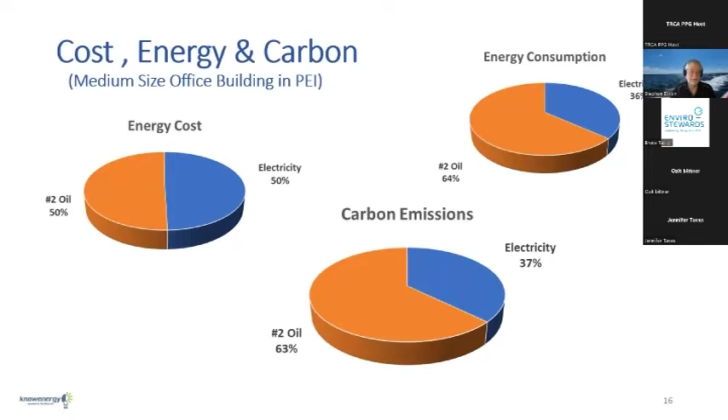So I'll provide a tool for that, Matt — we can send that out to everybody. You can put your numbers in and it'll generate your pie charts. This slide alone, I've had many people say, wow, that really changed my perspective on things.

The next segment, I'm going to talk about a walkthrough, going through a facility. This walkthrough was developed in small businesses like many of yours over many years of doing energy audits, energy assessments. I shy away from the term energy audit - I love energy assessment, energy walkthrough.

But there are really 7 steps in a walkthrough you have to take. You've got to start with understanding your consumption, price, and cost. What are you using, and what's it costing you? And what impact is it having in terms of carbon?

Then you need to understand how you compare to other organizations. Maybe you've got other facilities, stores, other plants, and so on within your organization - you can compare to theirs, or maybe you need to compare to others outside of your organization. I'll give you some ideas around how to do that.

Then you need to know when your building uses its energy. Today this is actually a very valuable and easy way to do things - we can look at your electricity profile. Some of you are going to be big enough that you'll be able to get a gas profile hourly and have a look at that. We find many opportunities there.

And then ultimately, just having a basic appreciation of where it's all going - is that machine over there, or that system over there, or this one in front of me, which is using more energy? Sometimes the size of the systems physically can actually belie their actual energy consumption.

So doing some basic numbers is a good thing. I'll provide a spreadsheet where people can dial in some basic information about a piece of equipment, and it'll give them an idea of what that cost might be.

Now, the first 4 steps is all about figuring out where all the energy is going. The next 3 steps is about what we can do, and the first step is get rid of waste. I define waste as being energy we don't need to use.

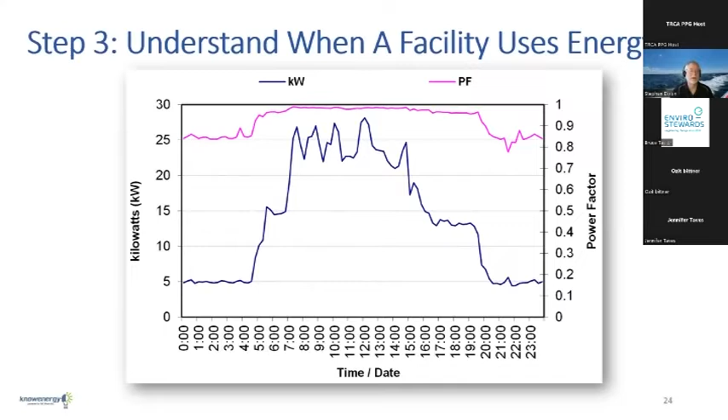We have a specific section on using a profile to understand where opportunities exist in your facility. I'll tell you a story of a facility that did this - we've done this in many types of buildings. This is actually a municipal building.

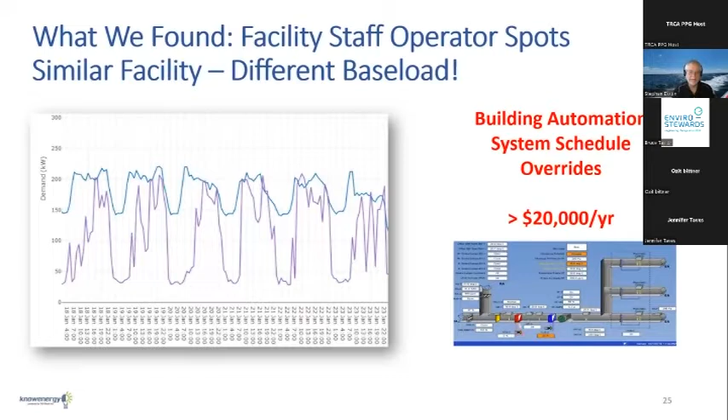So the 2 building operators, when we presented these graphs to them, actually sat and discussed, and they found over $20,000 worth of cost-saving opportunities. You can be guaranteed there was a lot of energy, both gas and electricity, attached to that finding. For them, that was a real win too, because they were able to see these things themselves. It wasn't somebody coming in saying you should do this - it was the operator going, look what we found. They owned that opportunity, fixed it, and realized the savings.

All right, understanding where a facility uses energy - this one becomes a little more complicated because you do have to do some calculation, but it's worthwhile sitting down if you can and starting to understand which devices in your facility use energy. You may need a little help for this, and there are probably some things that Matt and his organization can do to help you find resources here. There are also people from the gas company who can help you get some of these insights.

So reach out to those. But at the end of the day, have a reasonable understanding of where all the energy is going in your facility, because that's going to form the basis for what you can do. Oftentimes, if you've got this particular breakdown, people say, I didn't realize the lighting, or I didn't realize the plug load - in this building the plug load was 15%, but we found one the other day where the plug load, things you plug into the wall, were 37% of their energy consumption. That was a thing that needed action taken on.

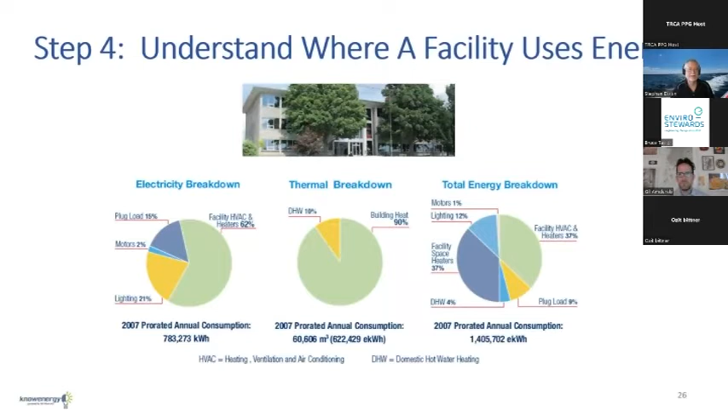All right, let's take a little further walk down the road here. The last three steps: waste, efficiency, and supply.

It always starts with what you need. Technically, we call this the current facility requirement. If you do an existing building commissioning, you take the systems in your building and go through a systematic process of optimizing them, getting them working the way they need to be. You'll do that versus what's called the current facility requirement. What do we need? Heating, cooling, air, fluid power, ventilation, illumination, all those things we get from energy. But to Bruce's point, do we really need them?

Maybe we could avoid using the lights. I had an office I was in for the better part of 20 years, and I never changed the light bulbs in that office. Why? Because I had a window at either end, and I arranged my desk in such a way that I virtually never had to use those light bulbs. They lasted 20 years. That's both an environmental and an energy benefit. So again, can we use natural lighting? It's a very simple thing, but you can eliminate a lot of energy use by simply taking advantage of the natural light available in any facility.

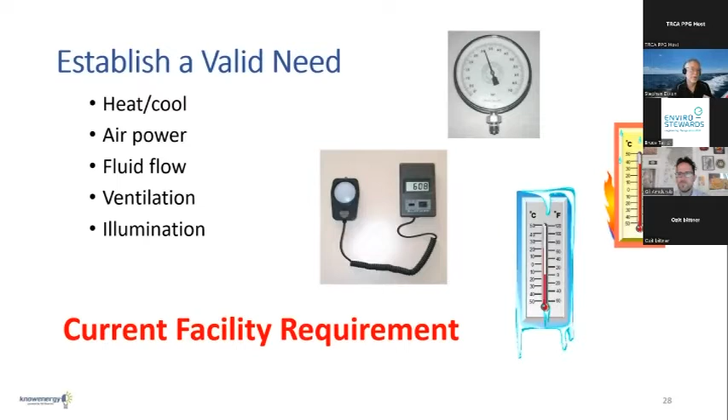At the end of the day, you probably will need to use energy, but documenting what you need, and not debating about it, is important. A lot of times when it's not documented properly, it becomes up for debate and nobody ever does anything about it. So making sure you understand specifically what you need is going to be very important, and whether you actually need to use energy at all.

Getting rid of waste comes down to a number of key things. The first is to right-size the systems, making sure you're meeting the need but not exceeding it. Very simply, turning things off, turning things down, and controlling things fit into this category. All your control systems, technically advanced systems like building automation, are really all about matching the requirement, making sure you meet the need but don't exceed it.

Turning things off—some things could be turned off. Sometimes it's manual, sometimes we need automation, but sometimes we need to improve the elements of the building. I call it air leakage through a window. How do you turn that off? Well, you weather strip the window, or you replace it. Phantom loads are things that are left on, with a light on to say they're turned off, but they're really on. I've got an example in a video in a few minutes on that one.

Turning things down: temperature, water, airflow, air pressure. We talked about compressed air—some of you have compressed air systems, with big opportunities in those systems. But it's not necessarily about putting in a better compressor. There are some good options for compressors, but at the end of the day it's about understanding what you need and only using the energy you really need. I remember one example in a metal stamping operation where they were using compressed air to move a part off the press after it was stamped.

They were using the equivalent of about a 50 or 60 horsepower motor to do that, costing about 40 kilowatts of electricity. They came up with a better way using electricity—a solenoid to shake the part, doing the same thing the air was doing. That took about 1 kilowatt, the equivalent of a little over 1 horsepower. So that was about a 95% reduction just by saying, we don't need to use air, we can use something else.

This example in the bottom right, let me blow it up so you can see it better. This was a person in a hotel getting very creative. Because the curtains were blown by the unit ventilator into the room whenever air came out, it wasn't distributing the heating and cooling effectively, and it was annoying the people in the room. He built this little plastic shield, which allowed the air to move more effectively in the room, getting more effective heating and cooling and removing the annoyance of a window that was open or light coming in while someone was trying to sleep. So, there's an example of getting creative.

Infiltration around a door. And Bruce, you talked about things you can do with cooling towers. Absolutely. There's just so many different ways, but we have to think creatively about how we do this and what all the integration opportunities are, meaning all the other things that can happen.

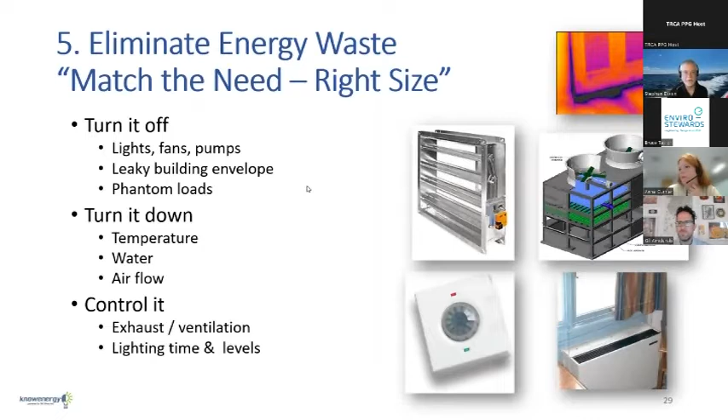Microwave ovens, right? Which uses more energy, cooking or the clocks? Well, it turns out that the clocks use more energy. In my microwave oven at home, it takes 14 watts to keep the clock running while waiting for me to cook something. If you multiply that by the number of hours in a year and do the math, it turns out I have to cook food in my microwave, which is about a 1,000-watt oven, for 20 minutes a day, every day of the year, to use the same amount of energy cooking as displaying time. So what do you do?

Well, the problem is when you buy a new microwave, you're probably going to get a lower draw over time, but bottom line, you can't change that. It's a very interesting fact that a small amount of power all the time can amount to a lot of energy, equivalent to a lot of power for a relatively short amount of time. So some people unplug their microwaves, and sometimes people try to turn off the clocks. But at the end of the day, newer microwaves will have less standby energy. So am I going to throw away my microwave? No, because that's got some impact on the environment as well. So I kind of have to balance things out.

All right, parallel pumps. Maybe you've got a couple of pumps operating circulating water. This is a facility, an office building where this was happening. It turns out there were two pumps running, one of them was a backup pump that didn't need to run. They even had fancy technology called variable speed drives that change the speed of them, and the variable speed drive on the first one told us exactly how much power it was using. So we could calculate if we turned it off, what we would save: almost $3,000 a year simply for turning it off. That piece of technology was supposed to save energy, but because it was being overridden in the system to be on all the time, it wasn't.

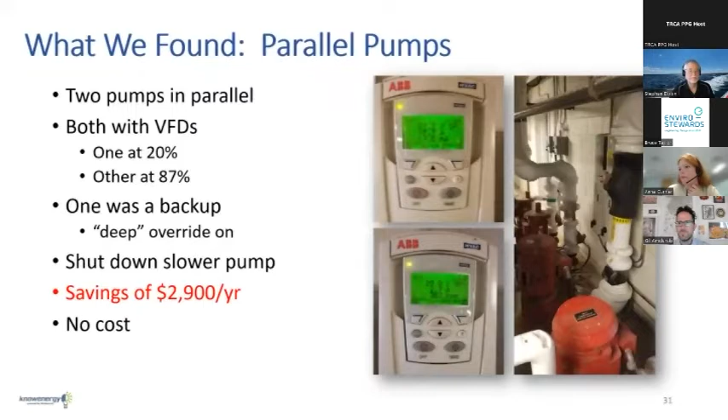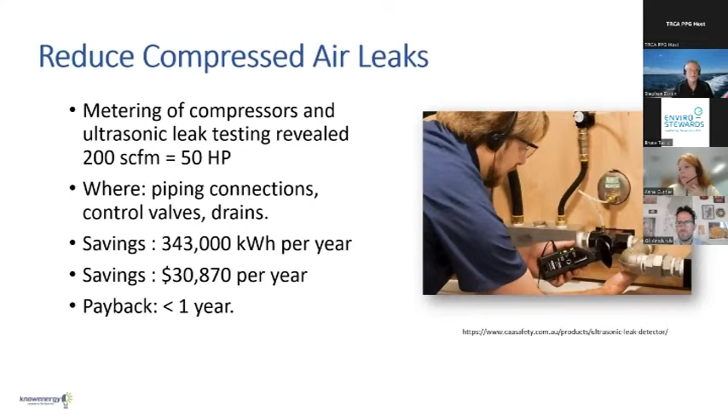Compressed air leaks, huge one, right? In any facility, if you can deal with compressed air leaks, this is going to pay back extremely quickly. Most compressed air systems we've looked at over the years have probably at least 10% of their capacity hitting leaks. The worst we've seen is over 50%, but I'd say 20 to 30% of most compressed air systems, if they haven't been looked at, the energy in them is going to overcoming leaks. That's just wasted energy. Simple.

Take a little walk through here, we've got a few videos. I'm going to show you this one because it's a short one, but there's a few more I'll highlight a little later, which I'll leave you to look at afterwards. This is actually from a restaurant—if you're a restaurant owner it's got some interesting facts in it. But this is how I would walk through a facility and look for opportunities.

A lot of restaurants have a lot of no-cost, low-cost opportunities. Let's take, for example, this TV over here. Looks like it's turned off, but it may be using power. I've got a little power meter hooked up over here. I'm gonna have a look at it. Look at that, 100 watts, and it's not doing anything. That's waste. Let's get this thing shut off.

Next, we're gonna take a look at the windows. In the theme of low cost, no cost, I always like to check windows, check the weather stripping, make sure there's no drafts. That way we're saving energy summer and winter, and creating a better environment for our customers.

Thermostats, another great low cost, no cost opportunity. Making sure that we control temperature properly, set the temperatures up, set the temperatures back when we're not here, and make sure we use the fan auto-off switch in the auto position if we don't need the fan to run all the time. A great way to save electricity.

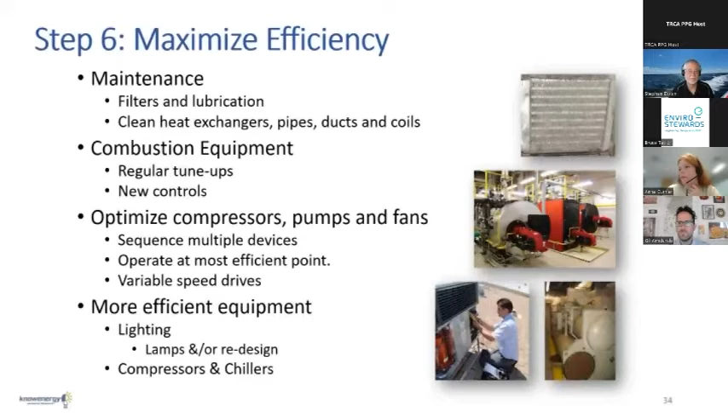We'll send along Matt a spreadsheet where people could actually do that - what is my investment return calculation for a piece of equipment that saves some energy? Treating energy efficiency as an investment, I think, is very important.

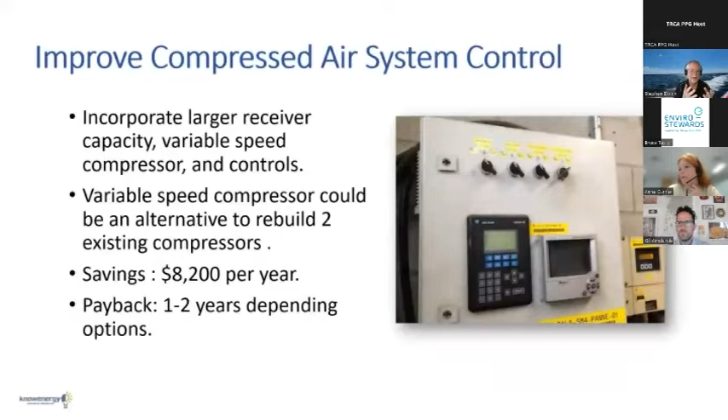Here we've got an example, a compressed air control system. Now we are talking about simple payback here, but ultimately this would probably have a return on investment of about 30 or 40% at the very least. How many other investments can you get 30 to 40% on for simply improving the way things are controlled?

Maybe it's the rooftop unit that's bringing air into your operation, that's circulating and providing heating and cooling. A lot of times these things aren't adjusted properly, aren't set up to operate properly, don't take advantage of free cooling properly. Without it, you could be probably paying 50% more for the cooling you're getting in your building because you're going to refrigeration cooling - mechanical cooling with compressors - earlier than you should. So making sure those rooftop units are tuned up and operating in a very efficient state.

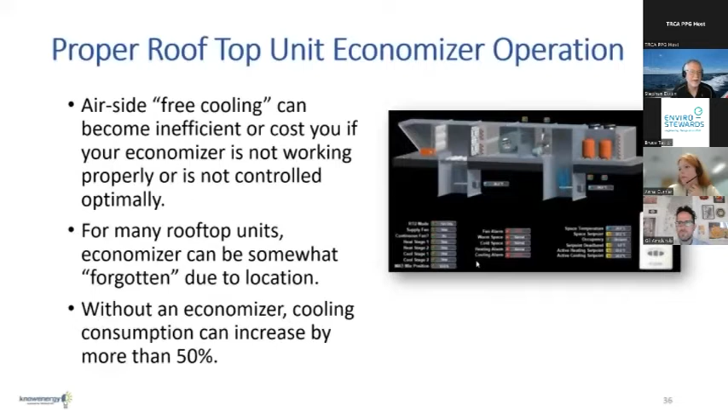Here's another video. If you've got a restaurant or any business that uses a lot of air for exhaust - could be manufacturing, various different businesses, but certainly restaurants - looking at HVAC systems and making sure they're balanced and meeting the needs. I'm not going to play that video now, just in the theme of keeping on time, but definitely have a look at that one. This one's only about 2 minutes long.

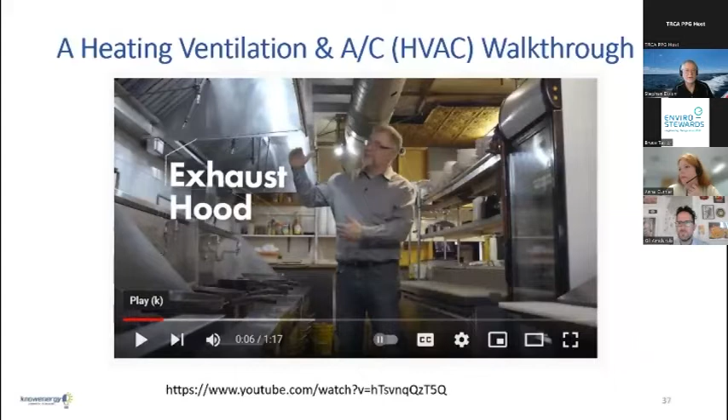At the end of the day, there's really going to be two types of opportunities, as I said before: waste and efficiency, before we get to the supply side of things. But I always like to categorize the waste and efficiency opportunities into lower cost things we can do and higher cost things we got to pay for. The lower cost things you can do manually - turning things off, getting rid of waste.

Or doing the maintenance properly, making sure the operating conditions are where they should be. Ultimately, we may have to spend some money, but I always like to think about the lower cost things before the higher cost things. So I put an order here: 1, 2, 3, and 4. There's no doubt that 4 is always the fourth thing, but whether it's 2, 3, or 3, 2, manual control is the first priority, making sure that we're doing all that we can do through simple means.

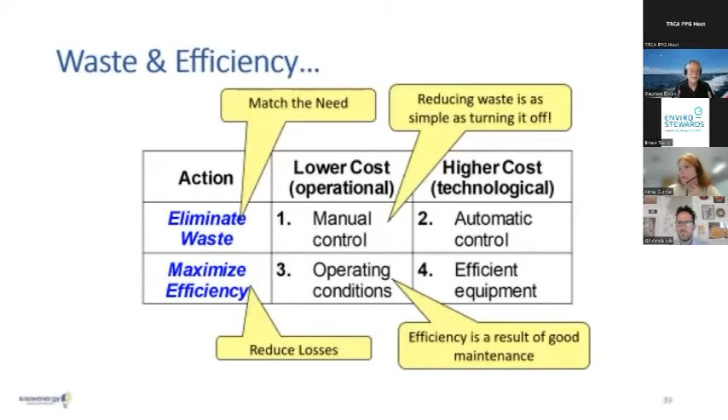So the 7 steps ends with this idea of optimizing the energy supply. What fits into that category? Well, things like recovering heat. Many of our homes have heat recovery equipment. It might have a heat recovery ventilator. Many of you have an energy recovery ventilator, or you may have one of these things called a drain water heat recovery unit that uses the water going down the drain to heat the water coming back in.

At the end of the day, this is the time to think about it. Once we've reduced the waste and improved the efficiency, then we can look at these types of things. Heat pumps are big today, really, really big. Everybody's looking at heat pumps from going from gas, from a sustainability viewpoint, to electricity, heat pumps, air source and ground source heat pumps, and renewable energy. So these all fit into this category ultimately.

And even people that are looking at supply contracts, I say make sure you understand how you're using the energy before you sign a contract of any sort. So I always put supply contracts in this category. But really, from the point of view of getting to net zero, the first 3 things on this list are really what we want to be thinking about in so many ways.

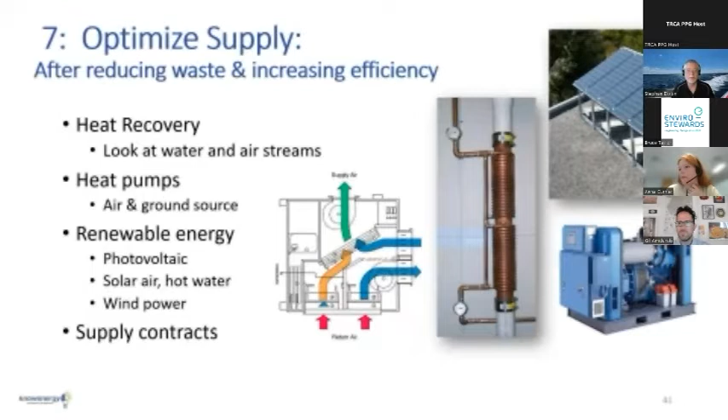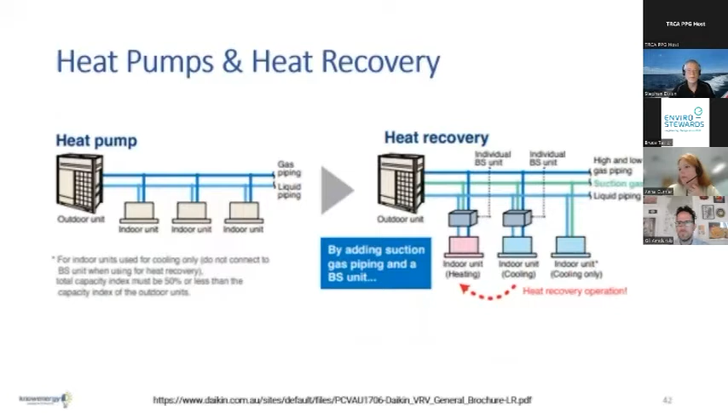I'm going to leave the thought with you that maybe there's a heat pump in your future. Whether you're replacing a rooftop unit and you can use a heat pump instead of just a traditional heating cooling unit with gas and electricity, or maybe it's an air source heat pump in the facility that you have a look at. Ground source heat pumps work in the right situation, that's a bigger capital investment.

And some of the heat pumps available today are incredibly efficient, or shouldn't really use the word efficiency, but they use a minimum amount of energy. Some of them can actually move heat around the building as well as taking heat from the outside air and bringing it in. So there's so many opportunities, and you're going to see lots of heat pumps in the future, and even ones that provide heat recovery for that matter.

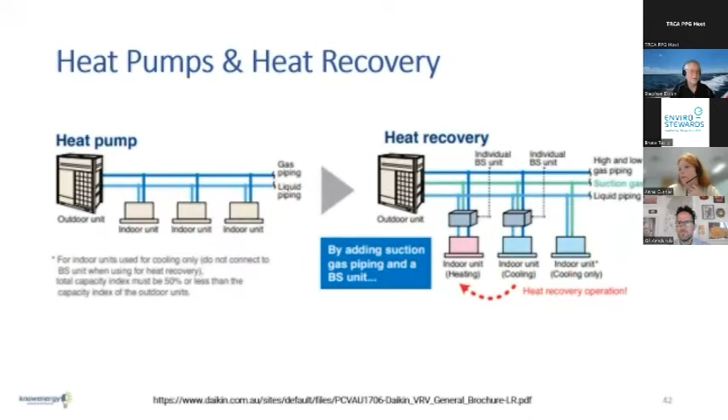If you're having an energy assessment, I would recommend you do your own walkthrough first, but then have an assessment done if that's something you feel you can afford. And I know, Matt, you provide some resources for that type of thing. But I've kind of laid out the example of a hotel or a little motel that had an energy assessment. We'll send this along as well as an example of what you might want to ask for when you do an energy assessment.

You get the breakdown of where the energy is going, you get the opportunities identified, but then you also get that nice table which shows you, if I do all these things, where am I going to end up? What are my CO2 emissions? What are my cost reductions? And what's my savings to investment ratio? What's interesting here is this little hotel, you can see it on the right-hand side, the internal rate of return, the interest rate that the investment in these energy efficiency opportunities was worth, was 55%.

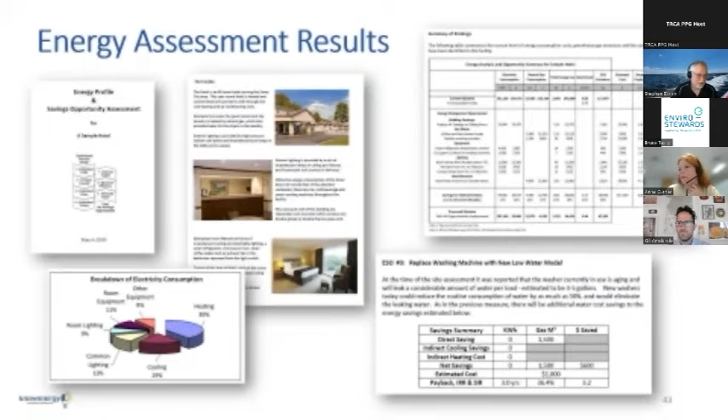Do you have a bank account or a mutual fund that can return 55%? Well, I don't, but energy efficiency does. So think about it from that point of view. As I said before, energy efficiency is an investment. Some simple worksheets here to help you moving forward, taking action after an energy walkthrough, or even just take this worksheet and walk through your facility.

Can I turn it off? Four things to ask yourself: can I turn it off, turn it down, or control it better? In the theme of the waste that I talked about earlier. Can I tune something up? Has it been looked at?

Can I improve the frequency of filter changes? Or maybe I need to get my HVAC guy to come in and take a look at that rooftop unit and give it a good once over, a good tune up. You can tune up a whole building in a sense—existing building commissioning—but you could probably take some of the larger systems and start to approach it that way too. Can I make something more routine? Maybe I need to put that filter change on a checklist. There are many things we can do on a routine basis that contribute to more efficiency just through better maintenance and better conditions for the equipment.

Eventually, maybe, can you make an investment in it? There still are a lot of incentives and rebates available for doing this. Maybe there's some old lighting around, or maybe there's an old compressor on a piece of refrigeration equipment. There are so many things you can do. It may need some money, but just remember, it's a good investment. Do the numbers and you'll realize just how good an investment energy efficiency is.

So, last stage here—according to my schedule, I've got about 6 or 7 minutes for this one to keep us on time.

One of the key tools I talked about earlier for finding opportunities is looking at when your facility uses electricity. I'm going to tell you a little story here.

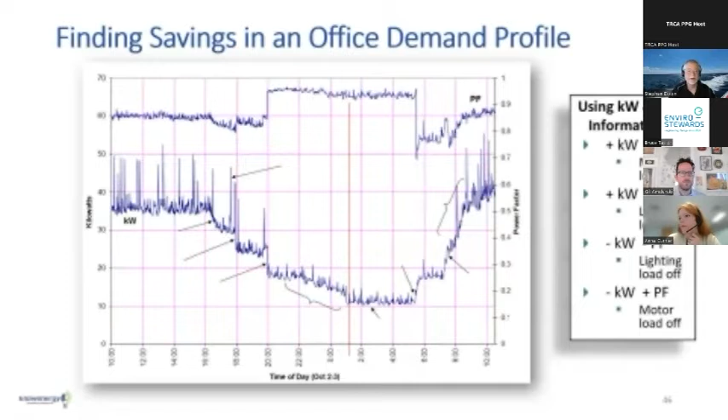Now, so you're not like Stephen Dixon - you don't have a power meter you can clip on. Maybe you do, but probably you don't, right? What do you do? Well, check with your local utility or distribution company, what we call the LDC, or your utility. So you could be Hydro One.

I know Orangeville Hydro have them, I know Alectra have them, and definitely Hydro One has them. So make sure you take advantage of these things - look at these graphs, see what they tell you.

Is your night load, I mean this night load here is pretty low - look at this, 10 to 15 kilowatts versus 60 to 70. That's actually very good. This one's not quite as good over here, but definitely a lot better than that building that was only a third. This one's turning down by probably 80 to 90%, right? So you can learn a lot from this data and find opportunities to simply turn things off, control things, but you can also use it to make sure, as Bruce said earlier, things aren't creeping back up again.

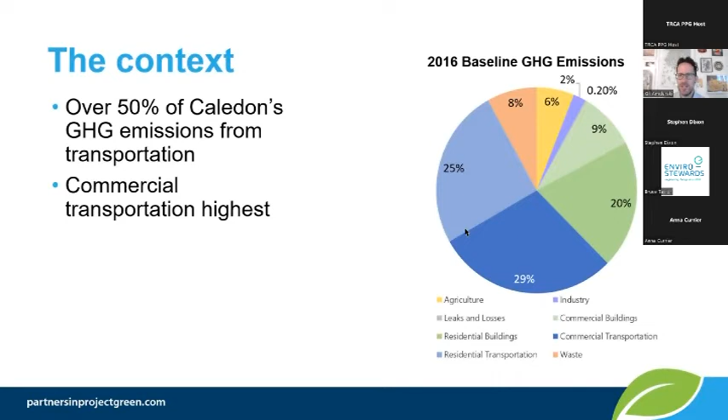Another thing people don't think about is hydrocarbons, the actual oils and crude oil that's transported around. I work for the TRCA, the Toronto and Region Conservation Authority. One of the major things we do is look at our watersheds, including watershed sampling, where we evaluate the quality of the water in our rivers, lakes, and streams. Hydrocarbons is just a number that's always been there for decades. It's maybe not always going to be there, but it's something we have to worry about. It's in our water, it's in our environment.

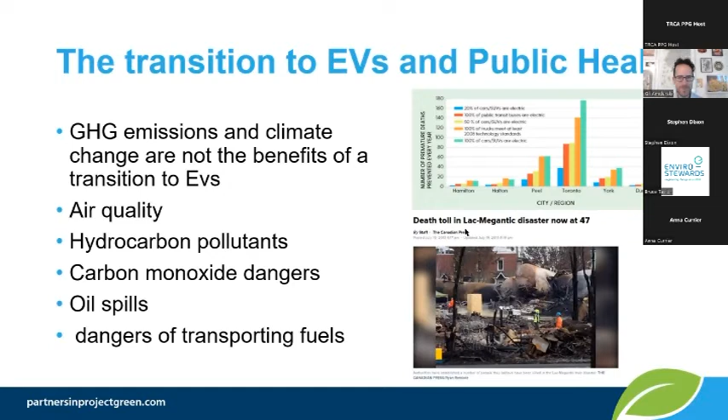So talking about electric vehicles and the current models today, people's thoughts and imaginations about electric cars is that the upfront costs are just so high that they can't seem to make the switch, and it just doesn't make sense to them.

You have a lot of benefits for electric vehicles versus internal combustion engines in terms of maintenance and operation costs. You're going to be doing way less brakes and rotors on an electric vehicle, because electric vehicles have regenerative braking, where they use the torque in the motor to slow down the vehicle instead of using the brakes. There's no transmission, no oil, so lots of benefits in terms of maintenance. Right now I think the biggest sell point is that gasoline is so expensive. I personally have an electric vehicle, it's a smaller range one, but it takes about 20 kilowatt-hours per 100 kilometers, so probably about $3 or so per 100 kilometers of driving.

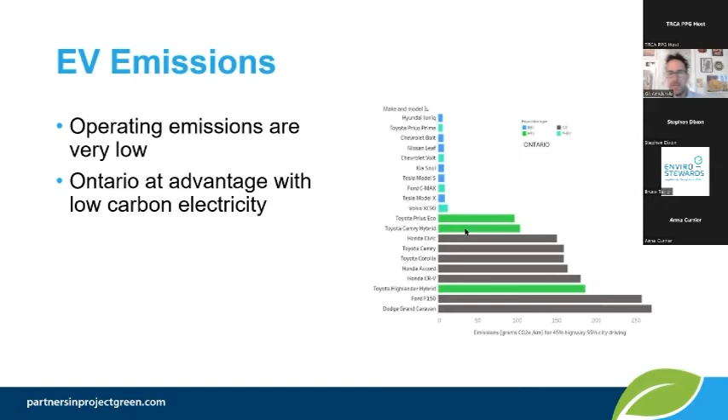One big question that everybody asks, maybe not everyone, is what about the life cycle? What about the manufacturing cost of the cars? I've heard, and even my friends sometimes approach me and say, oh yeah, but it takes more energy to manufacture those batteries than you'll ever recoup in savings or in GHG reduction. But we know that that's not the case, right?

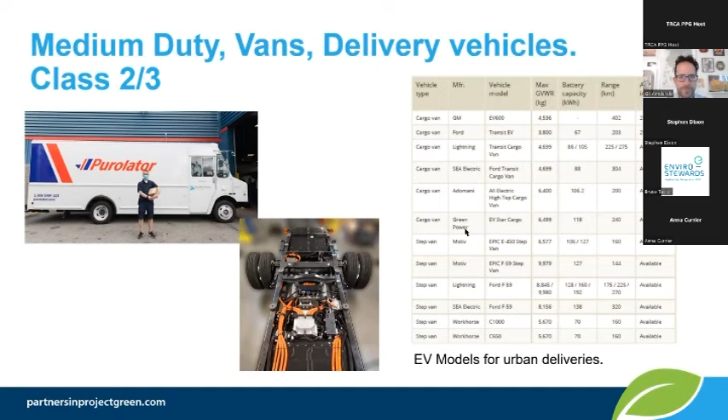Larger class vehicles. I know Caledon has a lot of shipping transportation and maybe shipping yards or yards that have semi-trailers. So one important vehicle to look at are the shunt trucks. They come in many names, including yard truck, yard hostler, yard jockey, spotter truck, terminal tractor, shunt truck.

Anyways, lots of names for these guys that can move trailers around. So they're used to move semi-trailers and shipping containers, loaded or empty. They're used usually for short distances, quickly and efficiently. They're commonly operated in warehouses, ports, cargo yards, truck terminals, cross dock facilities. They can be configured for both on-road and off-road applications.